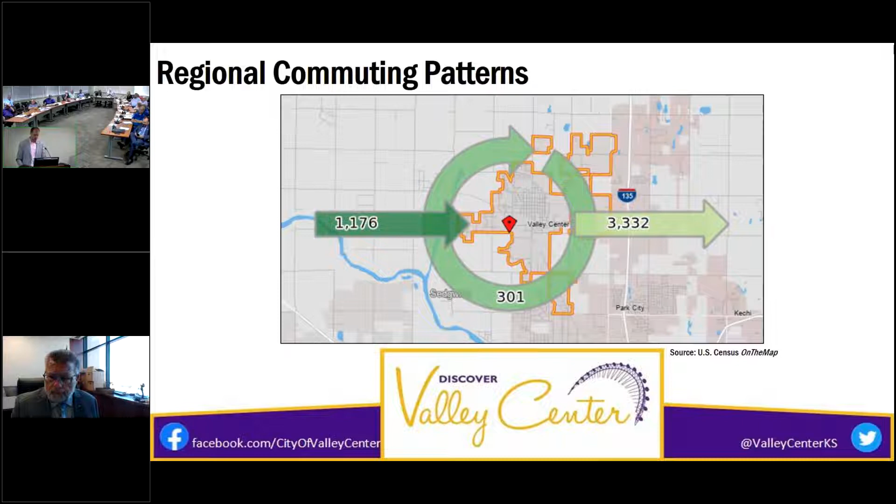Here's our regional commuting patterns that you're all aware of here at WAMPO. Got to always do a quick plug here.

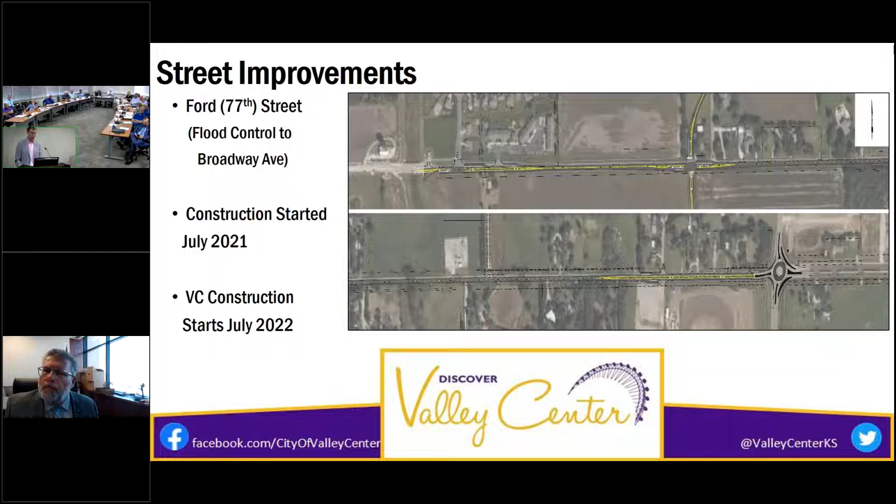Also, thanks to WAMPO, we'll be doing our Meridian Street project, from Main to 5th Street, a complete redo with a lot of drainage work since we don't have any stormwater drainage in this area. From Main to 5th Street we'll do a streetscape, decorative lighting, and some other fun things.

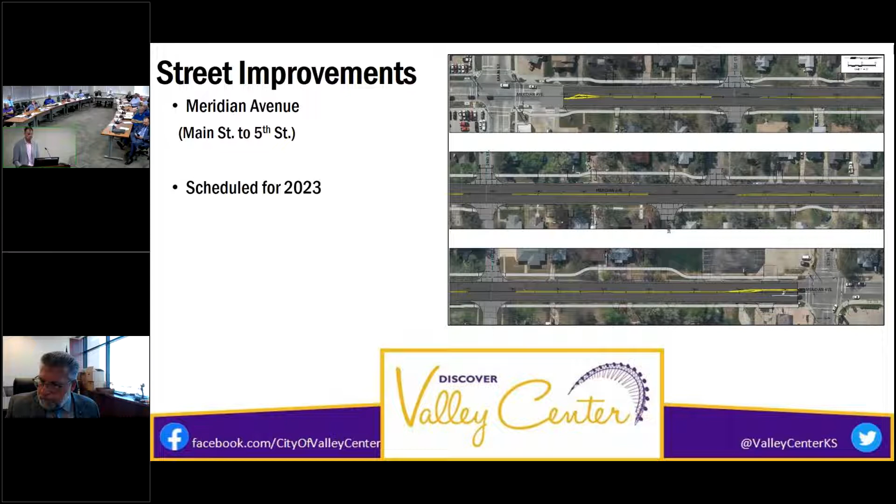Also on 69th Street, we're partnering with the county again on a potential roundabout at 69th Street and Meridian. This will go from our south city limits all the way north to the train tracks, for those familiar with Valley Center. This will also realign Ford Street and the entrance to Builders FirstSource, making it a safer entrance for all the truck traffic.

I forgot to mention, on Ford Street, due to oil prices being a little high, we were able to turn that into a concrete section. For about $471,000 more, thanks to the mayor, council, and Councilmember Colbert, we upgraded to a concrete road from the roundabout into the community all the way to Meridian. It will be a concrete corridor for us, so we're hoping for a lot of development off of that.

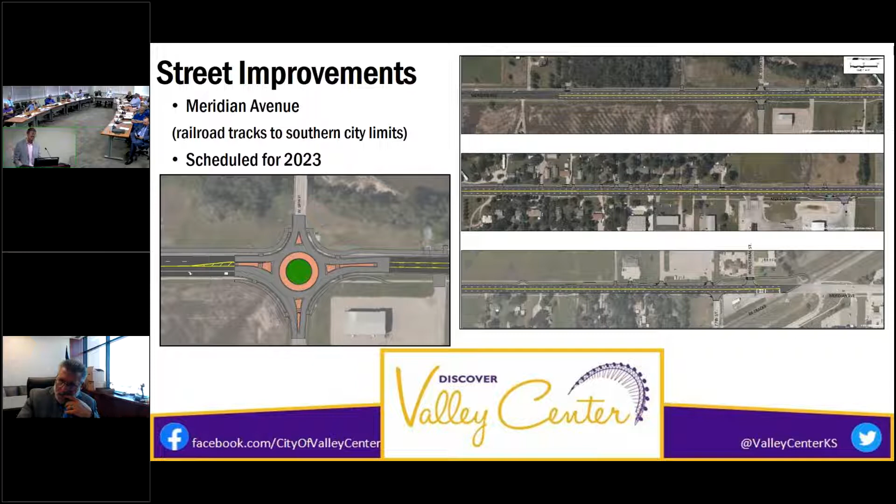This section of Meridian will go out for bid with lighting in May or June of '23. For Seneca improvements, where that red line ends at the top, that will be part of the Ford Street project. We were just awarded $1 million for the cost share, thanks to KDOT once again, and will continue Seneca Street from that point north to 85th Street, or 5th Street depending which you prefer, including a lot of right turn lanes.

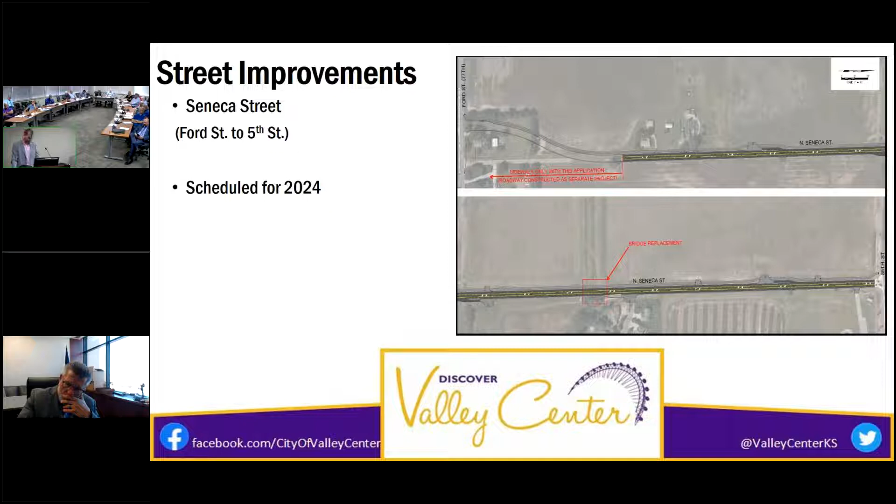We have 3 new subdivisions off of this road alone, as well as, thanks to the county once again, a TIF district - about $110 million investment in our TIF district that will also be off of Seneca Street. I'll talk about that here shortly.

We did apply for the Request for Open Projects. This is actually a new project, and we're looking for funding sources still, so we'll be looking at the infrastructure grant and projects. This will be turning Meridian by the intermediate school north into a 4-lane road versus a 2-lane currently, and it includes 2 roundabouts - one by the intermediate school and middle school, and one by Southwind at the middle school - then leading out north to 93rd Street. There's a new development that I'll get to here shortly, down at the bottom of your screen.

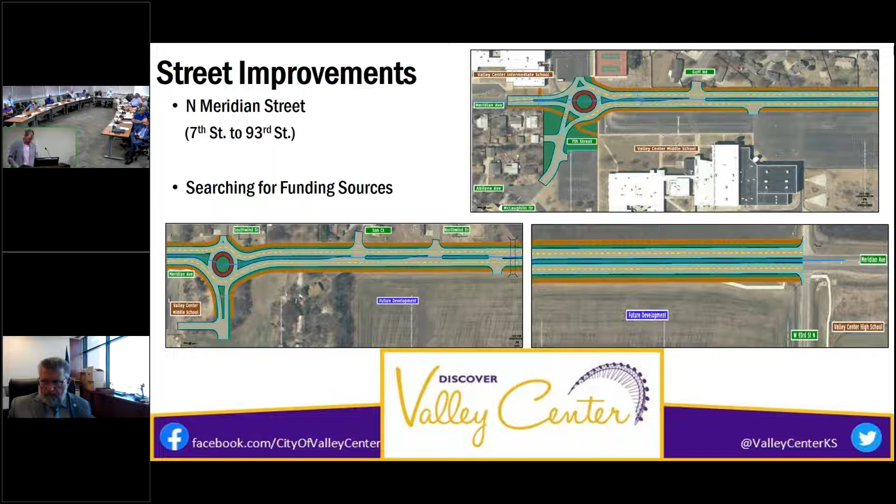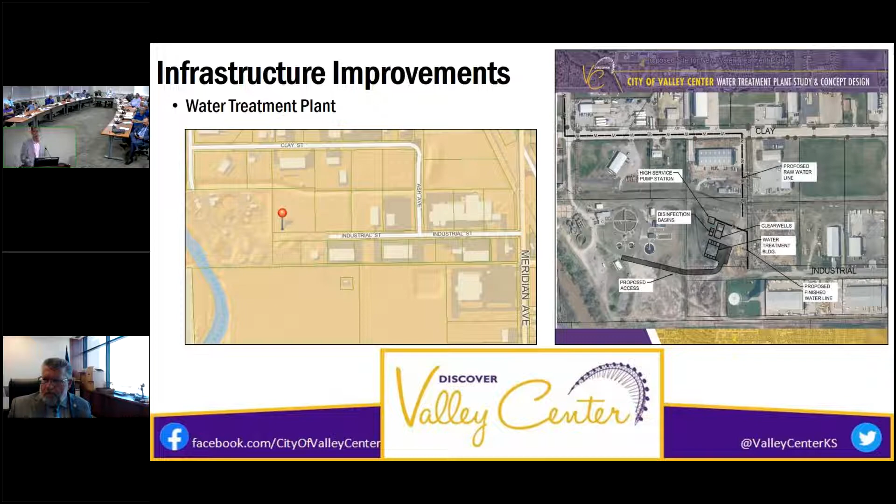Infrastructure improvements - we are pushing forward, and we actually have our RFP almost ready to go to solicit for our water plant design. We will be constructing our own water treatment plant. We have plenty of groundwater rights, so we plan to capitalize on that and still have Wichita as a supplemental source for our water supply.

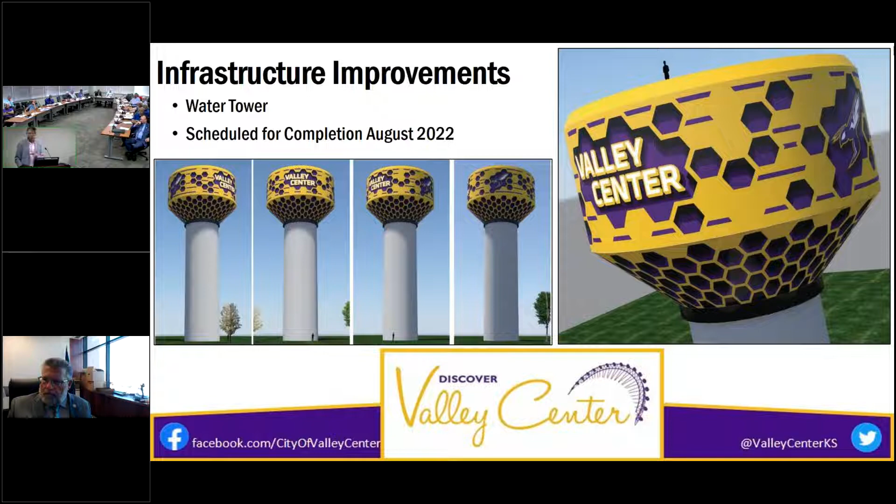Brick Mob was the one who actually won the design on this. We had a design contest with a top 3 for the community to vote on, and the community voted this as the #1 vote getter. It'll be exciting to see that coming up. And you know, there always will be tricks, so we've got some other tricks up our sleeves when it comes to the water tower itself.

So stay tuned. We also are doing a little crazy venture. I'm sure folks who have been around the region for a while remember back in the early 2000s, 2004 I think, Wichita had looked at potentially municipalizing their electrical system. So we are going to actually explore municipalizing our electrical system and purchasing the entire distribution system from Evergy.

Here's a sample of the utility billing flyer that went out right after the council decided on January 19th to give Evergy notice that we are going to renew our franchise for a 1-year period. So we are actually right now in the middle of our feasibility study. The community did hire New Gen Strategies and Solutions to help us in that endeavor.

We have a public power committee, a subcommittee. So if you're ever bored or want to fall asleep in the middle of the night, go onto our website and our YouTube channel and you can watch all the committee meetings when it comes to public power. This will be a great benefit to the community, and we're hoping to pave the way for all of our neighboring communities as well, that this is an option when it comes to your power supply and power options. There's an easy way in Kansas - Kansas state statute lays it out really nicely to municipalize your own electrical system. So we plan to do that.

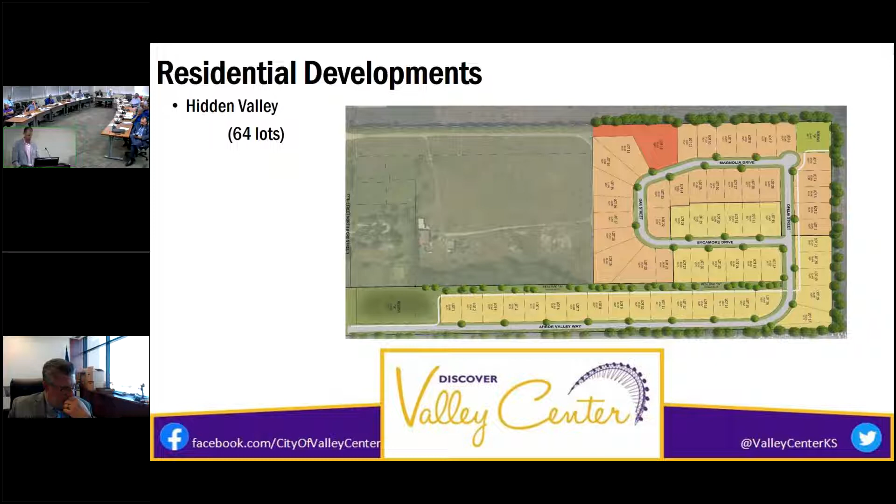Arbor Valley - this says Hidden Valley, but it's actually Arbor Valley now. 64 lots, going out for bid next week. That one's off of Ford Street.

This is our TIF district - 282 lots plus commercial and a reserve area, including a 62-acre park that will be a new regional detention area. I want to thank again Sedgwick County for partnering along with the city of Wichita in figuring out the drainage situation there when it comes to the ditch on the West Chisholm Trail. This will also be a wonderful opportunity to connect our regional trail system in this area to our neighboring communities in Park City, Bel Aire, and Wichita.

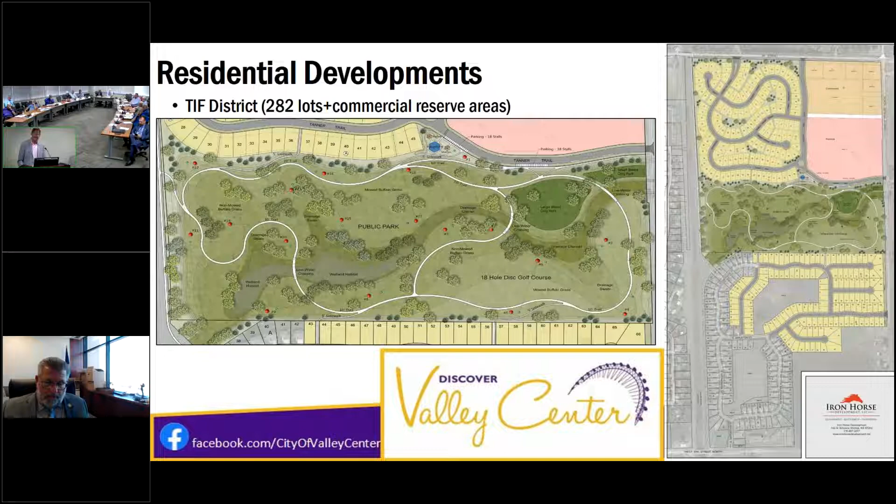I don't know if you saw last week, but we did have a little announcement - something that will be a first, definitely in Kansas, and actually the first in the U.S., when it comes to a multi-family 3D printed subdivision. This will be the first 3D printed housing development in Kansas, and then the first multi-family 3D printed subdivision in the U.S.

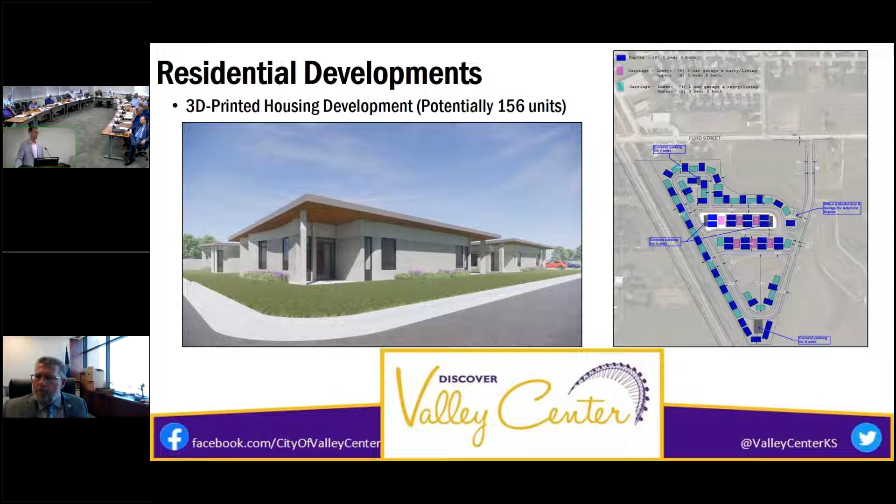They're looking at about 156 units on our Ford Street area, and we are moving right along. We met with the folks for the first time on Friday the 13th. I'll never forget that day, right before the Chamber Golf outing. We hope to have the final plat and all the construction documents on the street by September 6th of this year.

Construction will start in November, so that's exciting. Also, in between our high school and middle school on Meridian Street, this is part of that concept I showed you to turn the 2-lane road on Meridian Street into a 4-lane road. This would be adjacent to a new development with about 222 single-family lots, about 40 duplex lots, and then Reserve A, where we're going to potentially move our recreation aquatic complex and our new potential city buildings.

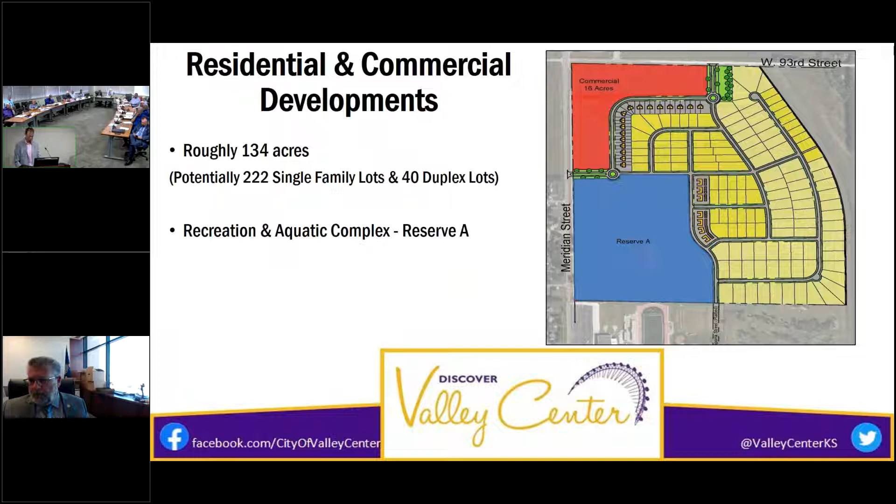Quality of place, here's what I just mentioned with the Recreation Aquatic Center. This too has its own separate subcommittee. So if you're bored, all of our meetings are on YouTube, so you can watch us in full transparency, address questions, and interact with the public.

Also wanted to mention on the quality of place, one of the primary goals in Valley Center is to reduce the monthly bills and the burden that we put on all of our taxpayers. Our residents work hard for their money just like all of us do, and we want them to be able to enjoy it. That's why we're taking on Evergy, that's why we're building our own water treatment plant, and that's why we're paying off our debt on the sewer plant early. It's to make sure there's more money at the end of the month in every one of our residents' pockets, so they can spend it in Wichita, Valley Center, Park City, and all these wonderful places.

So the mayor and council are very active, making sure that quality of life is a key component in any decision that we're making. I'll stay in for any questions.

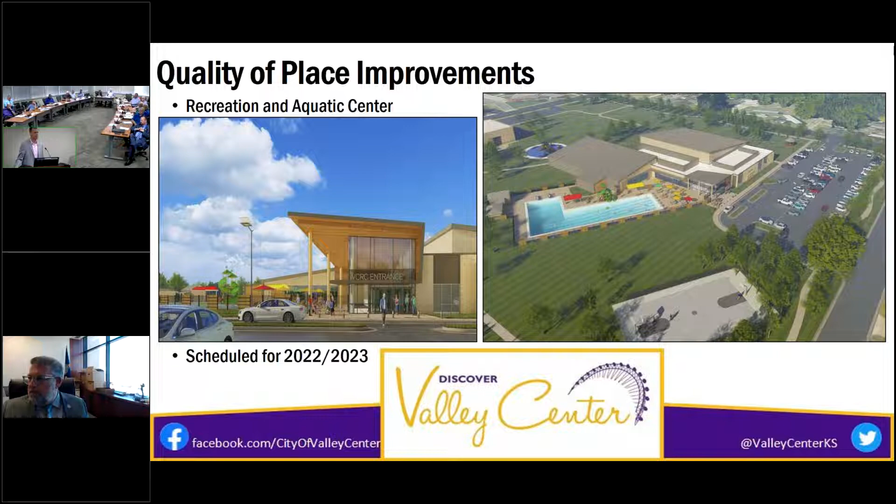Well, thank you, Brent. I saw on TV the other day where you were doing the 3D printing of the homes. How does the price of those compare with the price of a stick-built home?

They're still coming up with the figures. It kind of depends on which printer gets here first. The company we're working with actually bought a printer from overseas in Denmark, and that's stuck somewhere on the ocean on a barge. So they found another one in Pennsylvania that will hopefully be here in, I think, August or September. Depending on which printer they get, that will adjust the total overall cost. But CC3D will have more information when the time comes for specific questions about the price per square foot and all those things.

All of the duplexes and the 3D printed units will include patio homes, but also carriage homes, 2-story with the garage underneath. Every single unit will be 3-bedroom, 2-bath, about 1,100 to 1,200 square feet. So these aren't small structures. They are going to be rentals because for the first 5 years or so, they want to hold on to them in case there are any structural issues. They don't want to put up a bunch of single-family 3D printed homes and then have a bunch of issues with the structures themselves.